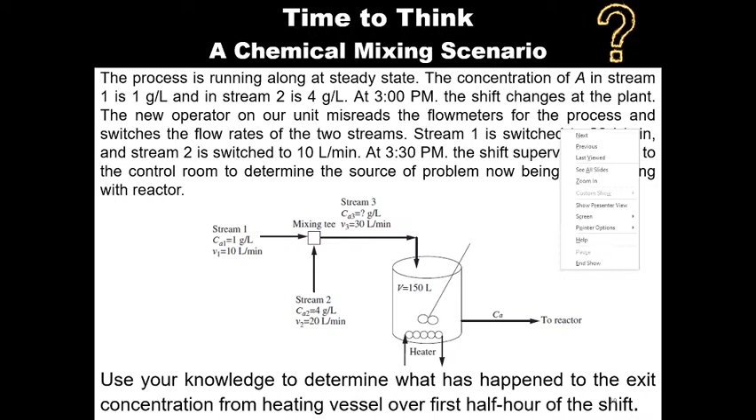So today we are going to discuss another topic of process dynamics, that is the need to study why process dynamics and control is important for this.

We have already seen one example of the sugar mill and the paper mill, where the wastes are discharged directly to the river. This also affects the environmental constraints. So we have to maintain those environmental constraints, satisfying the government norms given by the Bureau of Energy Efficiency and other regulatory boards of the environment.

Another need is meeting the required product quality. You have to maintain the product quality, and this is also the responsibility of the process engineer. Okay, more efficient use of raw materials.

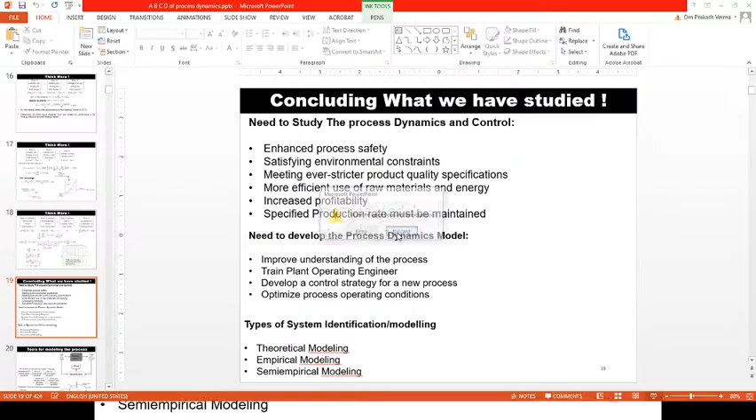Okay, next is the types of system identification modeling. This is most important when we have concluded that the dynamics is important. So you have to develop the model. In order to develop the model, you have to identify what are the different tools by which we can develop it. So what are the different types of models?

First is the theoretical modeling, which is based on conservation theory, or the physical law. Conservation theory or physical law means conservation of mass, mass balance, energy balance, component balance, and momentum balance. These are some physical laws by which you can develop the theoretical model. We will see in the example also.

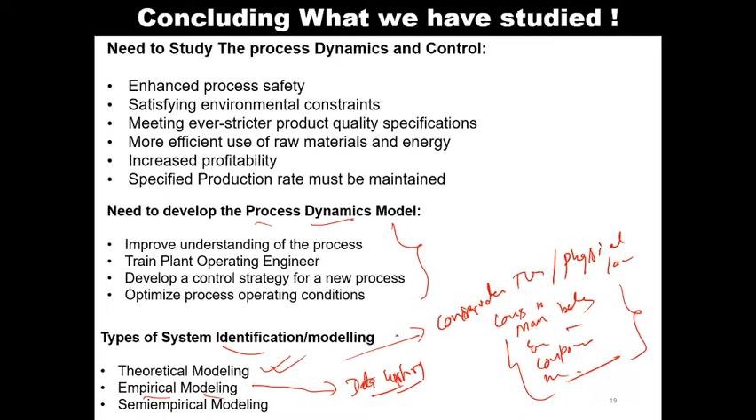Next is empirical modeling. Anyone can tell me what is empirical modeling? Any idea? Empirical modeling is emanated from data. Data history is important. So data history means, suppose the fuel rate is known for any motorbike, and the efficiency of that motor is also written. So you have the history of one month, or you can say 24 hours. So these are some fuel rate values, and corresponding to that the efficiency is noted.

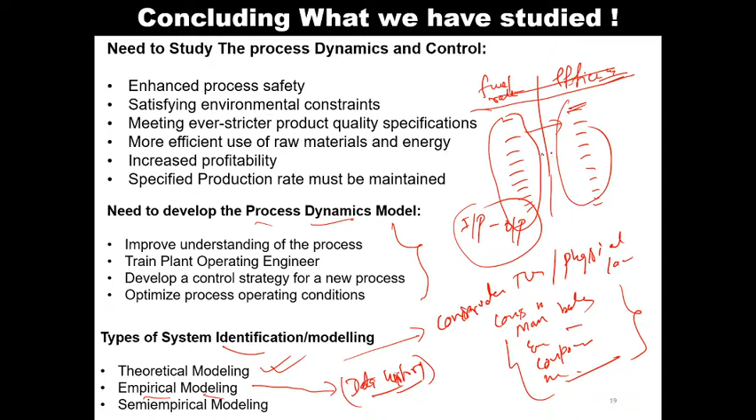So you can design your model based on this input-output mapping. Based on this data, you can design your input-output mapping, or the model. Such a model based on data is known as empirical modeling. And the tools generally used in order to develop the empirical model are regression.

So the most common is the ARMA model, autoregressive model, or you can say ARMAX model, which is one of the popular tools to develop the empirical model.

In semi-empirical model, some of the things are known theoretically, and some data is also available. So both theoretical and empirical modeling concepts are used in order to develop the semi-empirical model. So this is the tools for modeling for the process.

You can see here, this is the input, this is the output. The mapping of input to output in order to process is generally known as identification of this model. We identify output from input, and this identification is known as the model.

So overall it is known as model identification.

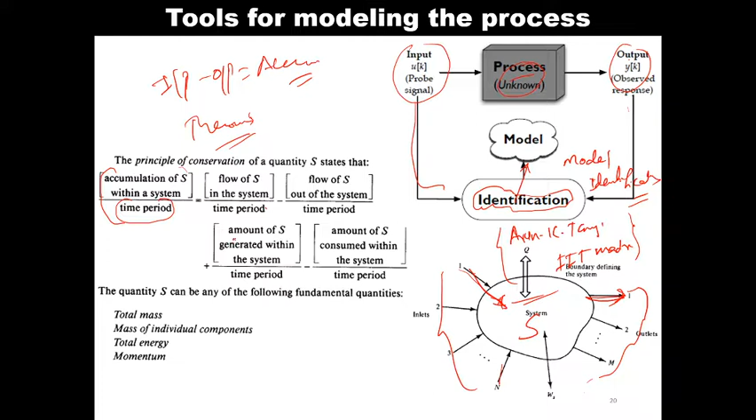Let's say this is the system, S. So flow into S minus flow out of S, in minus out. N is the input and M is the output. So N input minus M output, plus, if there is any generation of energy or mass inside the body, if yes, then you have to add the amount of S generated within the system.

Let's say in energy, there are two types: exothermic reaction and endothermic reaction. Exothermic—anyone can tell me what is an exothermic reaction?

Exothermic and endothermic reaction - endo means energy is consumed, exo means energy is released. Let's say A and B are two chemicals: A is coming from here, B from there, when both mix, some energy is also released, so that released energy also has to be added - the energy of A plus energy of B plus whatever energy is released. Or if A is mass, B is mass, and some other mass is evolved, then you have to add that. So this is the amount of S generated within the system, and similarly the absorbed amount of S consumed within the system if it is endothermic, or in case of mass absorption.

So whatever it means, the total idea is: in minus out equals accumulation, nothing else. In minus out equals accumulation - this is the part of the in, this is the part of the out, or consumed. So this S may be anything - any of the fundamental quantities like mass, like component, like energy, like momentum.

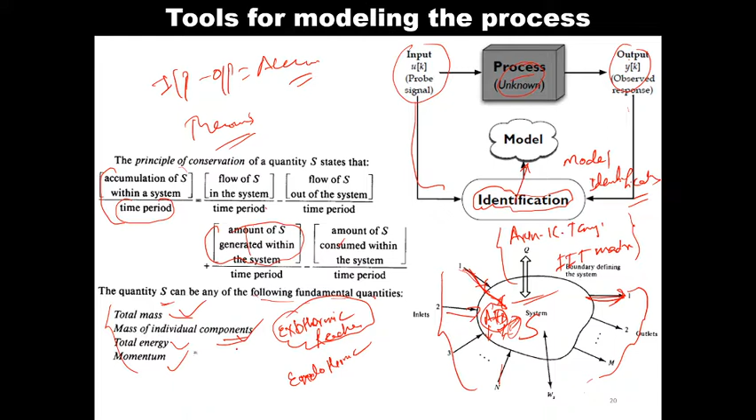So what is the mass balance? You can see here - it is very clear, in minus out equals accumulation. In similar way, the conservation of component: in minus out plus rate of component I produced is equals to rate of I accumulated. Accumulation equals in minus out plus something produced or something absorbed. If you don't want to write this term also, you can ignore it.

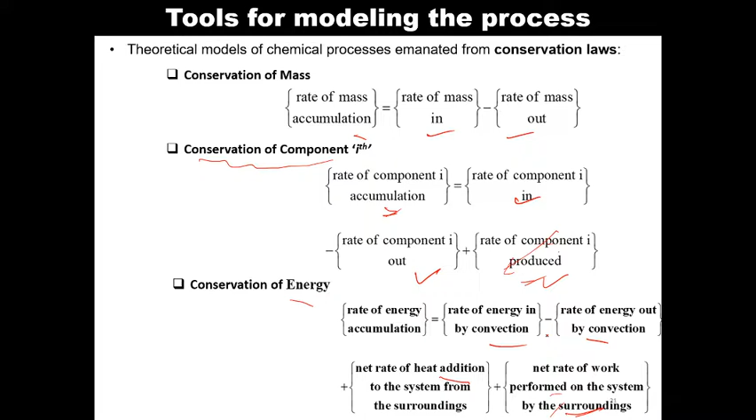In similar way, for energy: in minus out plus some addition, minus some absorption. So in minus out equals some addition minus some surrounding energy that is also there. So overall, the total idea is that in minus out equals accumulation, nothing else.

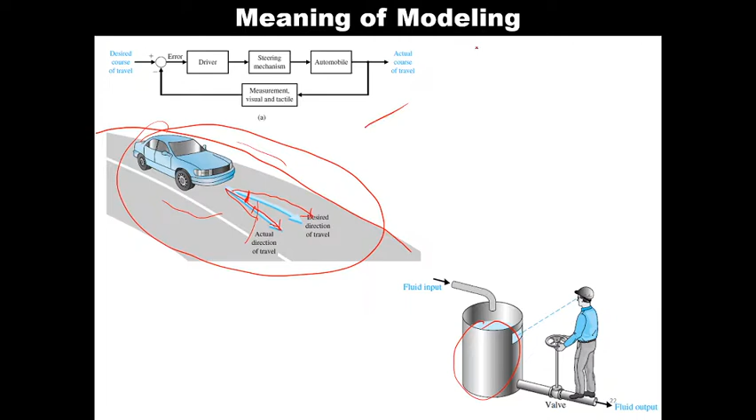So in order to understand all this stuff, the transfer function, or the model that gets developed, you will generally see that it may be an algebraic equation. Generally this is the steady state equation, and steady state equations are in the form of algebraic equations - it may be a single algebraic equation, maybe simultaneous algebraic equations, maybe linear algebraic equations, maybe non-linear algebraic equations, maybe non-linear simultaneous algebraic equations, and maybe linear simultaneous algebraic equations. Is it clear what I'm saying?

Yes or no? Linear - yes sir. Linear algebraic equation, maybe non-linear algebraic equation, maybe simultaneous algebraic equation, right? Algebraic equation.

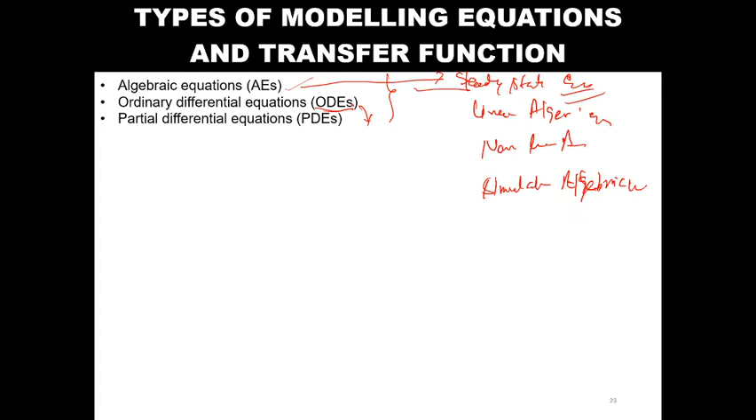The model may be in the form of the ODE, ordinary differential equation. Maybe the first order, maybe the second order, maybe the third order. Similarly, it may be a single differential equation or simultaneous ODE. Maybe linear or non-linear. Maybe homogeneous or non-homogeneous differential equation.

In a similar way, there's the partial differential equation. So the difference between ordinary differential equation and partial differential equation types of modeling is: first is the lumped type of model, and second one is the distributed model.

In the case of the lumped parametric model, generally the ODE is involved. However, in the case of the distributed parametric model, you will see the partial differential equation type of equation come into the picture. So what is the difference between lumped and distributed parametric model? I will let you know in some time.

So I already told the different types of modeling: linear, non-linear. This equation, algebraic equation, ODE or PDE, may be linear or non-linear. Maybe these equations are static or dynamic, maybe the equations are lumped parametric or distributed parametric model, and maybe deterministic or probabilistic.

This is a simple object here. But in the case of the distributed parametric model, at x is equals to x1 - let's say x is equals to 0 and x is equals to L. So the distribution of the temperature is varying from 0 to L, yes or no?

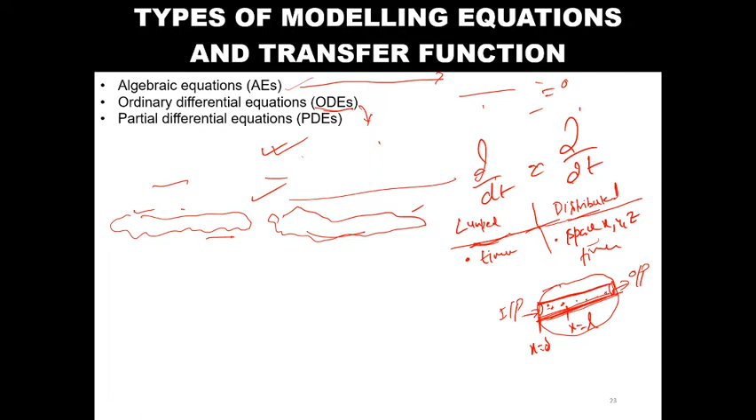This is not uniform, right? However, in the case of the lumped parametric model, it will be the same - we are considering the temperature is same among all parts of the rod. However, in the case of the distributed parametric model, there is a difference in the temperature. So this is the lumped and distributed parametric model.